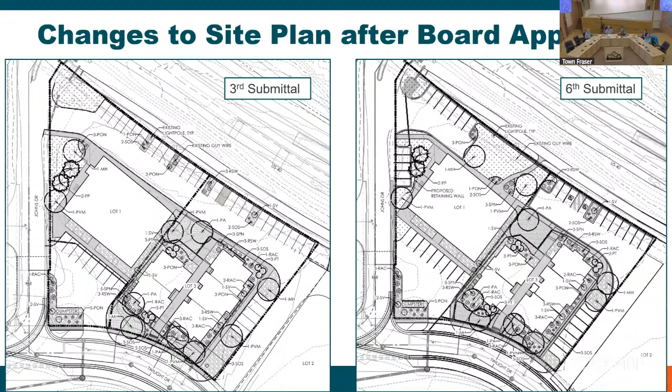So anything from the public at all? Okay.

Motion? I'll make a motion to approve the extension. I don't know what else to say. Is it Resolution 2026-0301? Yeah, okay, I make a motion to approve BOA Resolution 2026-0301, approving an extension to the duration of approval for the Ascent height variance.

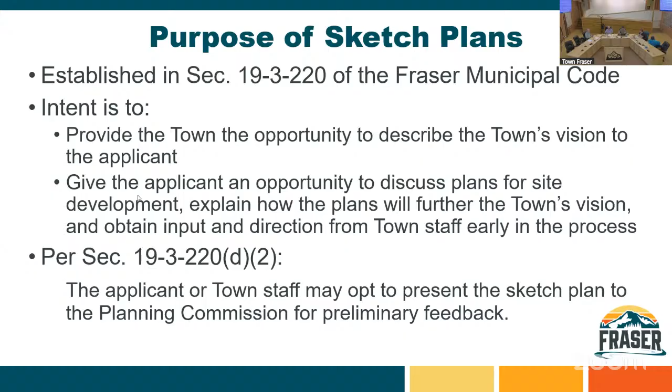So the applicant and property owner is 255 Mill LLC. We have Tom Fowler here in the room with us representing the property owner, as well as Jeff Van Sambeek and Nathan Meeson on the Zoom call, also as part of the project team.

This project is located on interior lots on the north side of Mill Avenue between Highway 40 and the railroad. The sketch plan proposes a total of 13 residential units, as well as approximately 1,800 square feet of general commercial space. This project is in the Riverwalk zone.

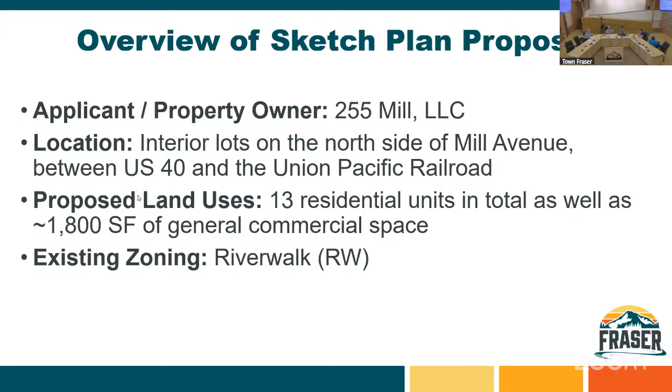Staff first met with the applicant about a year ago, and they submitted their sketch plan just about 2 months ago in late January. So definitely excited to see this brought forward, and excited to hear your feedback.

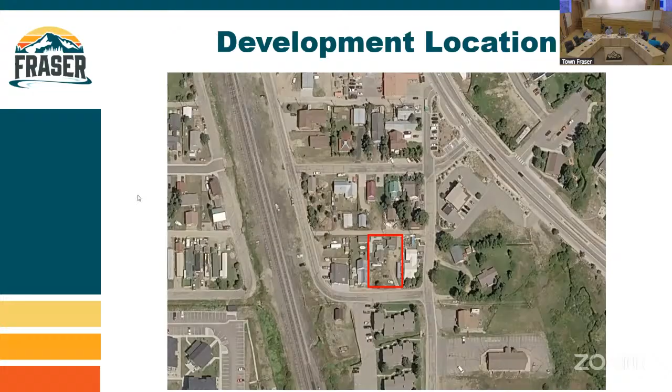So here's a look at the property location, again, on the north side of Mill Avenue, bounded there in red. And here's a look at that property in our zoning map.

Primarily surrounded by other properties, also in the Riverwalk zone. The Divide condos to the south of Mill Avenue are high-density multifamily. And then there are some properties just to the east of Doc Susie that are zoned business.

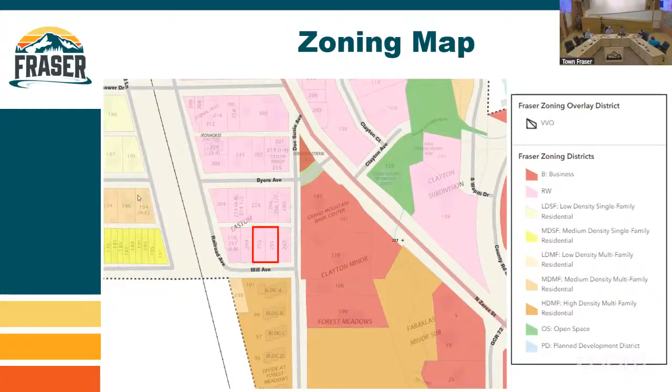But in a way, this is a pretty whole-scale reimagining, trying to use the entitlements of the Riverwalk zone district.

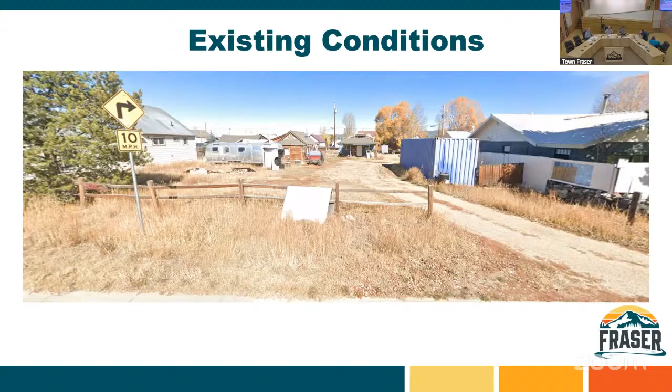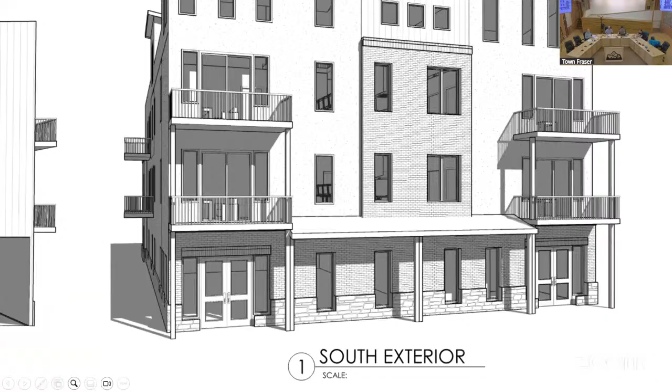Even though this is a black and white rendering, some of the proposed facade materials are evident. If I could zoom in here, such as some stone masonry and brick, and then other, maybe more generic siding or stucco type material proposed.

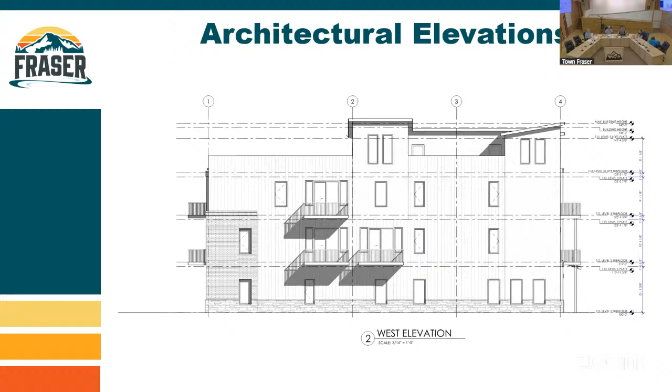Here's a look at the elevation, at a scaled architectural view. I just wanted to note that, at this level of detail and the height that is being shown, this does comply with the 45 feet maximum building height, as you can see at the very top line, within the base height that's allowed.

So next I wanted to talk about a few of the things that staff identified in our review. I will be brief on these, but please feel free to interrupt me with any questions. Want to give the applicant an opportunity to talk about their plans. After they submitted this and staff reviewed it, they indicated that they would be tweaking some things, so definitely want to give them an opportunity to share any updates to their concept.

Starting off with residential density in the Riverwalk Zone District, the base density that is allowed is 20 units per acre. That can be increased by one of two different means. One is the provision of ground floor commercial uses, which increases density up to 40 units per acre. The other is by providing deed restricted affordable units, and when that is done, there is no maximum unit per acre density, but the development still has to meet all other zoning requirements: height, setbacks, parking, etc.

So this sketch plan, as provided to the town, envisioned using the ground floor commercial density bonus, which would allow a total of 12 units on the site. The site is just under a third of an acre. Additionally, a 13th unit could be allowed based on staff's interpretation of our ADU regulations.

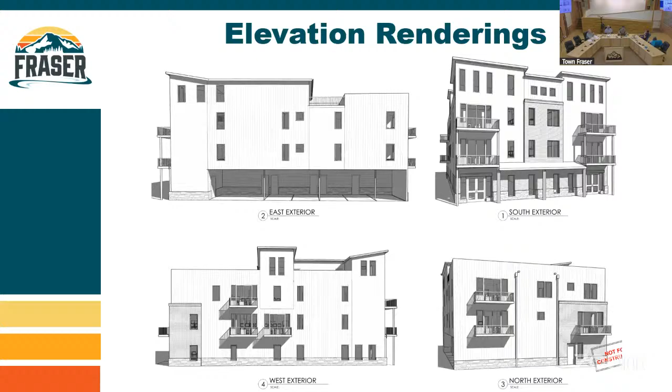Question: you say it has to be tied to a unit in the main building? Any unit, or a unit that would be in close proximity to cottage A? It doesn't necessarily need to be in close proximity. It could be a unit on the second or third floor. It doesn't necessarily need to be the ground floor unit, if that's what you're asking.

I was asking if it's to be connected to an existing property that's being built, wouldn't it make sense for it to be a connecting unit that's close by cottage A? Yeah, I guess they're connecting in the sense that their ownership can't be severed from one another. So the ADU cannot be sold separately, its ownership has to be tied to that of another residential unit. As long as there is that legal ownership framework for the ADU, its physical proximity on the site is less of a concern, or it's something that's not really spoken to in our code, I would say.

Okay, I get it. How big is that cottage?

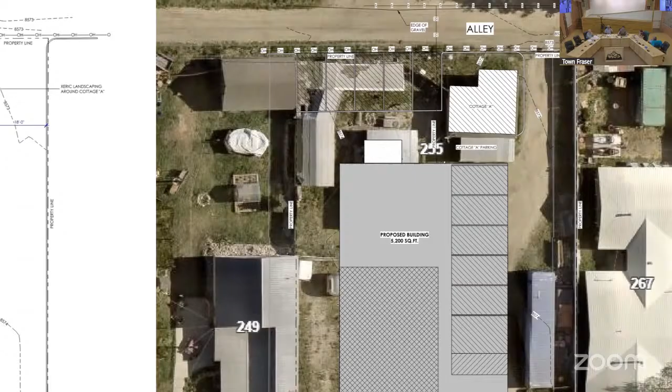Cliff Clayton was born in that cottage. Oh, really? Oh wow, it's tiny. So it's really small. So it's not an issue with the 50%.

For some of the units, it could meet that, and we can pull up the sketch plan later. The applicant, when they're presenting, can clarify. My recollection is that this cottage A was on the order of between 400 and 500 square feet, and I think the ground floor ADA accessible unit was the largest,

and may meet that 50% requirement. Just curious, did it belong to the HOA as a caretaker unit, or kind of an odd concept? Yeah, potentially. I think our code is maybe somewhat silent on that.

I think the ADU itself is kind of counted outside of that unit-per-acre calculation. So for other zone districts, like our multifamily residential zones that allow a certain number of units per lot or per lot size, you could build that number of units, say a triplex or fourplex, and still have an ADU on top of that. So it's kind of like an additional bonus unit, but as far as it being a caretaker unit, I think our code is relatively silent on that.

But why could they not just condominiumize that cottage as well? I was getting ready to ask the same question. So it gets them over the number of units? Right. In this case, because they're seeking this 40 unit per acre density, or at least that was initially proposed, that caps them at 12 units overall. So 12 units in the main building plus the ADU is kind of the workaround to that.

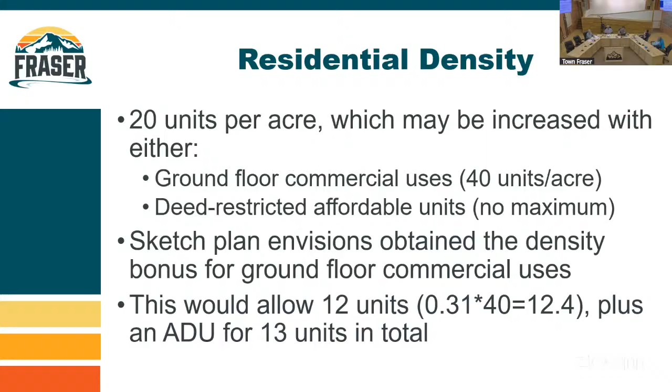Any other questions on this aspect of the density?

What's the setback from the side of the building to the west? So in the Riverwalk zone for a mixed use proposal, there are no minimum lot setbacks. Like this plat, do you know what that setback is?

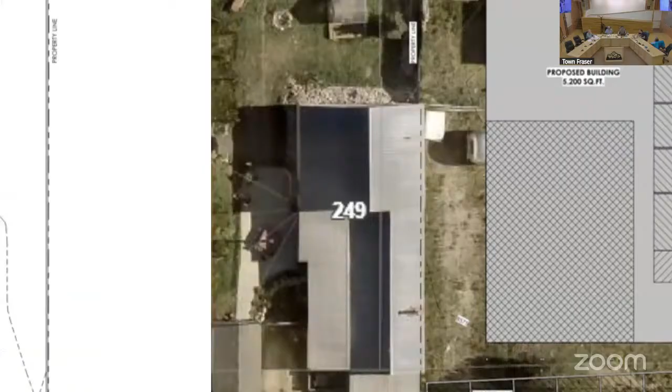I wonder if it triggers the fire code. There was more room, a decent amount of room on the west side. Just eyeballing it, it looks like 15 feet, maybe 12 to 15 feet, just looking at the parking space.

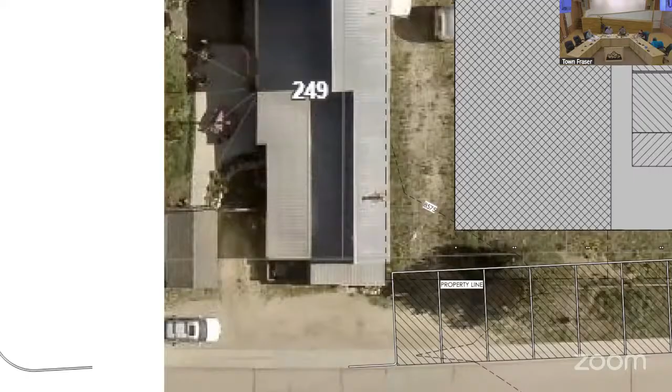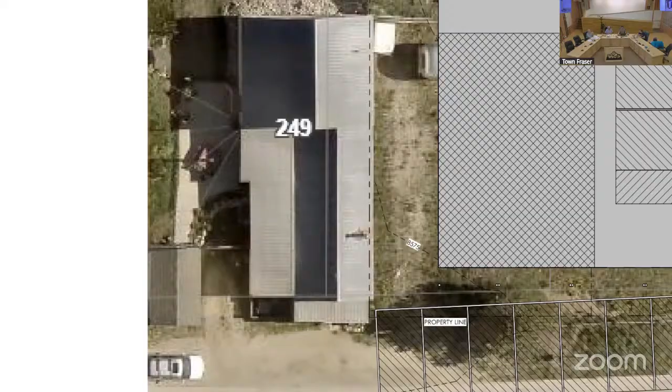This brings up an interesting question we may face in the future. If you're within the fire requirements where you've got a fireproof assembly, there's an existing building next door to a building that wants to get into that setback - who pays for that existing building to be made fireproof? I would assume it would have to be the developer, but I wonder if our code even addresses that. I don't think so.

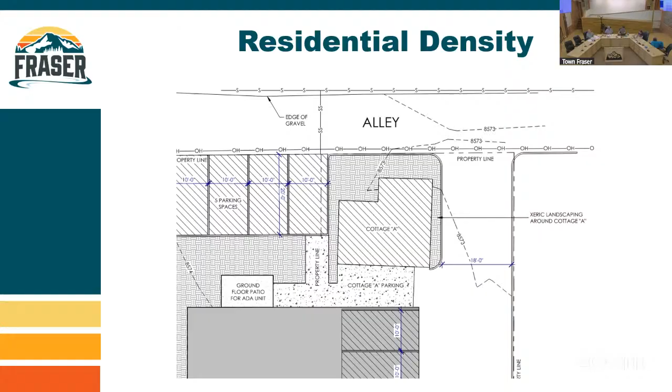The sketch plan here helps us identify things that may be shortcomings in our code. I'd hate to think that a homeowner would have to do thousands of dollars worth of improvement to their building to allow the neighbor to get within the fire setback. Just a thought.

Excellent point. So last thing I'll touch on is residential density. For this ground floor commercial density bonus provision in the Riverwalk zone, our code says it's met if at least 40% of the ground floor of the structure is commercial. So in staff's view, we considered the tuck under parking area, looking at everything bounded in this red box as the ground floor area of the structure, because the second and third floors have occupiable space in this area, so we used that larger ratio.

I think it could certainly be argued that an interpretation of our code should look at the occupied space on the ground floor and exclude the tuck under parking area, even if there are occupied uses above it. That is what the applicant initially assumed, looking at this L shape as the ground floor of the structure. Admittedly, that's probably the most correct reading of the exact language in our code.

But reading it that way has the potential to lead to outcomes that are not as desirable - I'm thinking of a situation where the majority of the ground floor is dedicated to tuck under parking with a very small, token commercial space. I do think the applicant is making a good faith effort to balance uses here. If you include the tuck under parking area, the commercial ratio is about 35%, so they're not too far off from 40%. But if you remove it and look at just this area, they're at approximately 48%, so meeting it if you calculate it that way.

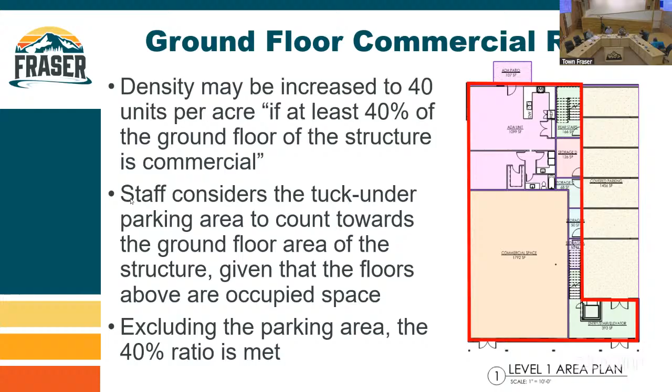Go ahead and we'll finish the presentation, a little bit more discussion, and bring the applicant and the public into it. I'll be quick on these next few so we have more time for open discussion. So the next items I just wanted to highlight deal with parking and the sidewalk.

The applicant proposed 7 perpendicular parking spaces along Mill Avenue, mostly within the Mill Avenue right-of-way, to serve the development. On-street parking is allowed to serve the parking minimums for properties in the Riverwalk zone.

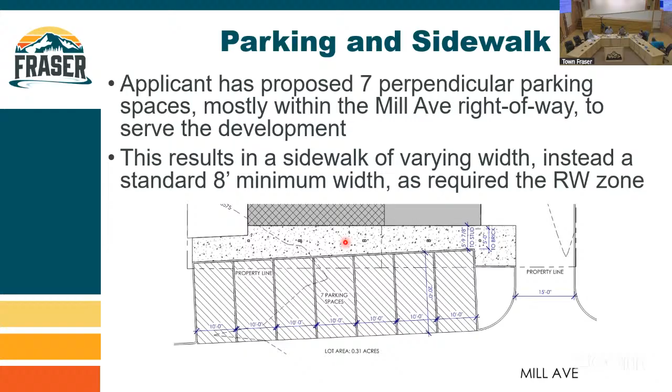One of the quirks with this proposal was that the alignment of these parking spaces reflected the existing paved area of Mill Avenue, which I'll show on the next slide as well. This resulted in a skewed parking angle in relation to the building and the lot line. And then you had this sidewalk of varying width, approximately 5 feet at the narrowest, widening out going to the west. So this kind of shows those parking spaces angled to respect the existing alignment of Mill Avenue, if you will.

But one other thing is that sidewalks are required to be a minimum of 8 feet in width in the Riverwalk zone, so this sketch plan isn't compliant with that provision of our code. Also, in staff's opinion, I think perpendicular spaces may not be consistent with the long-term vision of the street, or our downtown streets in Fraser more generally.

So something that staff proposed to the applicant was to first locate the sidewalk fully within the Mill Avenue right-of-way. Mill Avenue has 60 feet here - this white line at the bottom is the southern end of the right-of-way boundary. So within a 60-foot right-of-way, you can fit 8-foot sidewalks on both sides, parallel parking spaces on both sides, and a travel lane. That's what the town is doing over on Clayton Court this summer.

So the initial suggestion from town staff is to do a similar type of street section, and as an initial phase, the applicant would simply be responsible for the area in front of their property - building the sidewalk lot line to lot line and paving this area. It looks like you could maybe fit 4, but certainly 3 parallel spaces in this area. At a minimum, this could be viewed as an interim condition, as staff, the planning commission, and board of trustees envision a more finalized vision for the entirety of Mill Avenue.

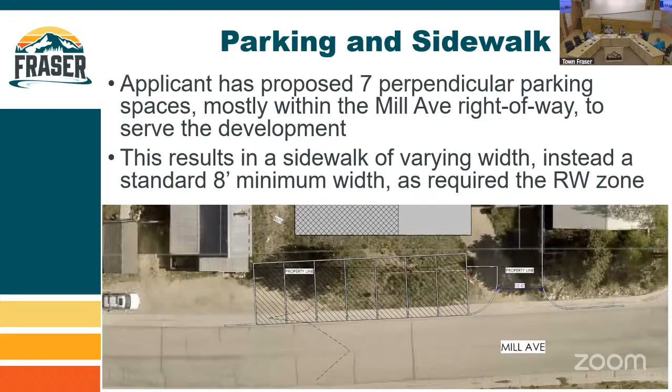Are they needing the perpendicular parking in order to meet requirements? Are they short on parking for the number of units? Is that why they want perpendicular versus your suggestion of parallel? Yes, with the perpendicular spaces, in staff's view they were just 1, maybe 2 spaces short depending on how you do the math. Even with the perpendicular, and the amount of commercial square footage and number of units and bedroom counts, depending on how you round, they're 1 or 2 spaces deficient.

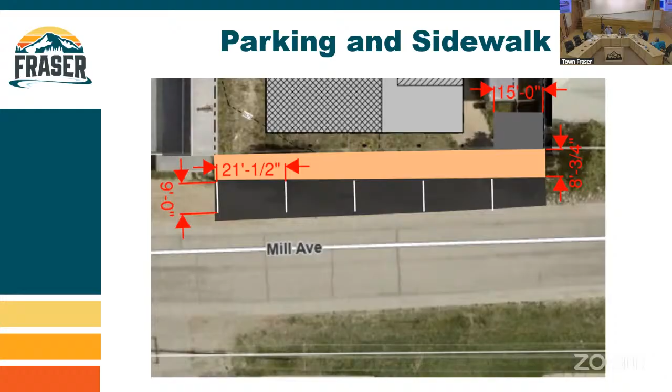So even when you go from perpendicular to parallel and you lose 3 or 4 of those spaces, that creates more of a deficiency, certainly with this proposal. But that's a great segue into the next item for discussion.

In our code, there is an allowance, a 10% parking reduction for properties that are within 250 feet of a transit corridor, which our code defines as Highway 40. In staff's opinion, 250 feet is a very short distance. This radius shown here is 250 feet, placing that at the edge of Highway 40. This site is just outside of that, being down here.

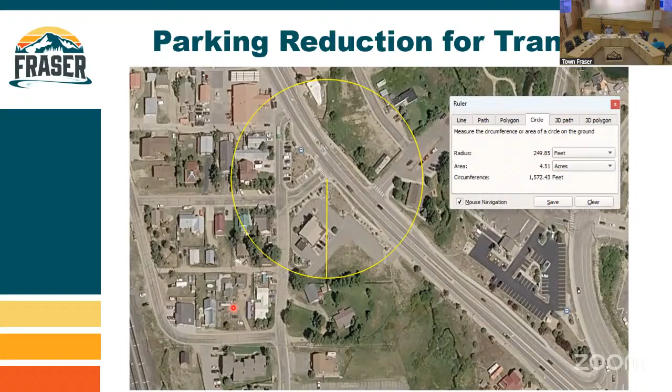In more urban contexts, or when thinking about transit planning, a typical walk shed to a transit stop is anywhere from 1/8 of a mile to half a mile. Again, our context here in Fraser should be viewed somewhat differently than just general best practices. But something I wanted to show the Planning Commission is a 1/4 mile radius around the site. There are 10 different Lift bus stops, and a handful in very close proximity. Goranson Station is certainly extremely walkable from the site, as well as the Amtrak station, the Bustang stop. So I would personally view this site as being in close proximity to transit based on this alone.

But just looking at the size of even a 1/4 mile radius, if we amend our code to allow this, we're talking about a potential transit reduction for most, if not all, properties in the Riverwalk Zone District. So it's a balance between the on-the-ground reality that there is pretty good access to transit throughout the district, but that was also the vision for the Riverwalk district, as a walkable district.

And I think that 10% reduction is still subject to planning commission and board approval. And if it's not written that way, it certainly could be. It's not an automatic thing, is my understanding. So these again are opportunities to clean up our regulations too.

I'd like to point out that if you're looking at LEED standards, they have radiuses that they promote for their neighborhood plans and transit. I believe, going by memory, 1/4 mile is what they use. If you're within 1/4 mile, then you qualify for the LEED standard. It's something we ought to look at and be consistent with. But I'm certainly okay with 1/4 mile. Yeah, I am too.

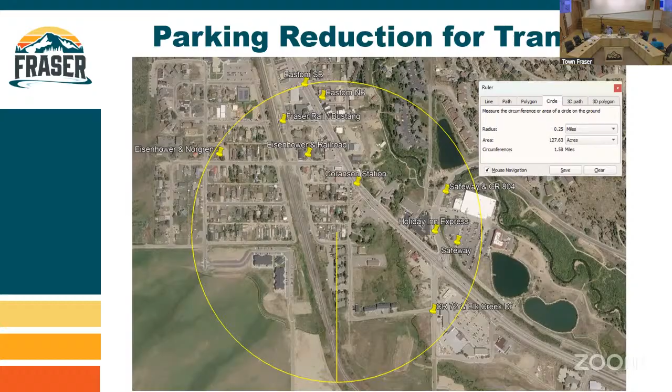Even in ski boots. Yeah, I've walked further than that in ski boots before. You have to just get from the stupid parking lot to the base of the mountain.

So that concludes the major items I wanted to touch on. Certainly there's other aspects of this proposal we can discuss with the applicant. But as a reminder, next steps: it would be a major site plan application. The applicant would also need to submit a major subdivision to combine what are currently 2 lots into one. Staff is recommending that the preliminary plat step be waived, allowing the applicant to proceed straight to a final plat.

It's an allowance in our code: if a sketch plan is submitted, staff has the ability to waive the preliminary plat. The reason is that especially when the sketch plan comes to the Planning Commission, it's viewed as a public forum for reviewing the application, though not a noticed public hearing. By doing that early in the process, it allows them to skip that step while still having public hearings for the major site plan and final plat. So it incentivizes the applicant to do the sketch plan to get initial feedback, and by doing so they get to skip a noticed public hearing.

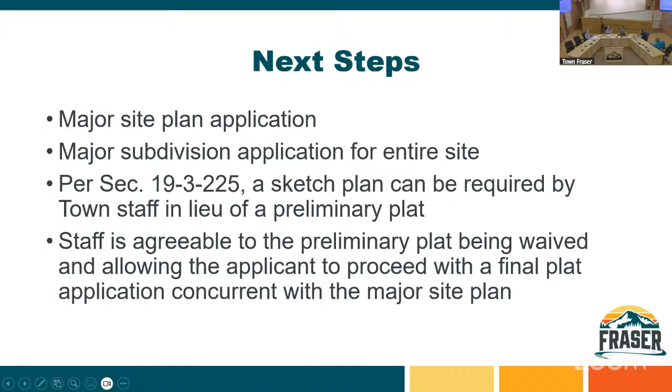You cited one thing in our regulation that talks about relative sizes of buildings. This is our first major project in what was a residential area, and has been a business zone for a long time. But we've got 2 houses on either side that are 12 feet tall—well, Bryant's is a bit taller. I'm not sure how we address that. Maybe steps in the building, kind of a clerestory type approach.

They've got a loft apartment on the fourth floor that, without losing a lot of square footage, is there some way to make the mass of this look not quite so out of place in that neighborhood? Although that neighborhood could, over the years, have changed all of this too. But I think we put that in the regulations for a reason.

That's a great point. Referencing our building design standards for commercial and mixed-use development in section 194190, there is a design guideline that speaks to the mass of buildings, and it says they should be compatible with adjacent buildings. I think it's up to interpretation by the commission and our board how much weight you give to what the zone district allows for this site compared to the existing uses that have been there historically. But I certainly don't argue that a building of this size would be taller than what's there adjacent to it currently.

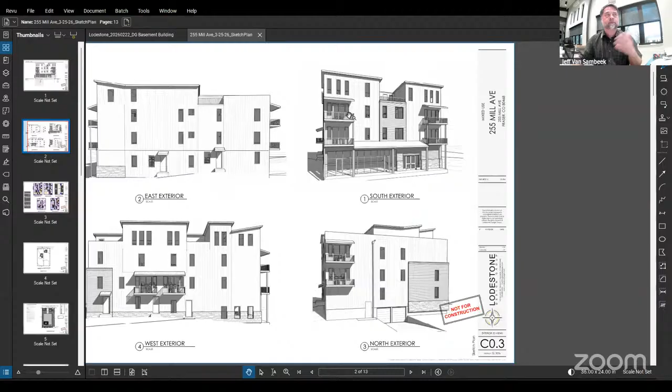So after making our submittal back in, I guess it was December, we came in and had a meeting with staff after receiving the comments on the initial sketch plan. In my opinion, it was an incredibly helpful meeting for us to get a better understanding of what we didn't understand about the Riverwalk District Zone and what the goals were there. So we took a lot of the feedback from that meeting and the sketch plan comments and implemented them in a revised version. I'll run through this quickly, and then I'm happy to answer any questions about why we made the changes we did. I think this mitigates a lot of the more significant concerns that staff had.

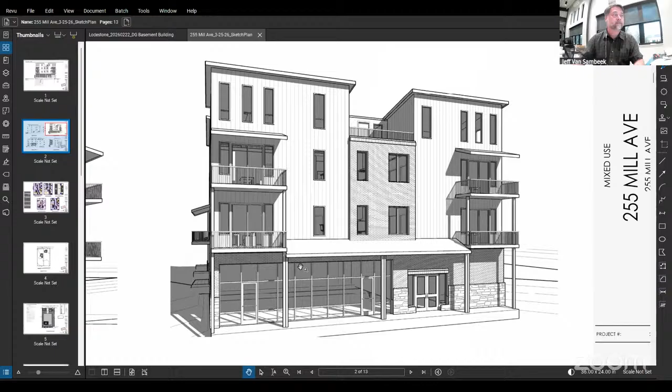Overall, the look at the building hasn't changed a whole lot. We did freshen it up a little bit and added some features that staff noted in their comments. But the big change we made is actually how we address the site. The plan now is to do a parking level underneath the building, not fully underground because of the limited space we have on the site to actually ramp, but to come off the alley with a drive aisle that ramps down to essentially a garden level basement, and do all the parking underneath the building, or most of it.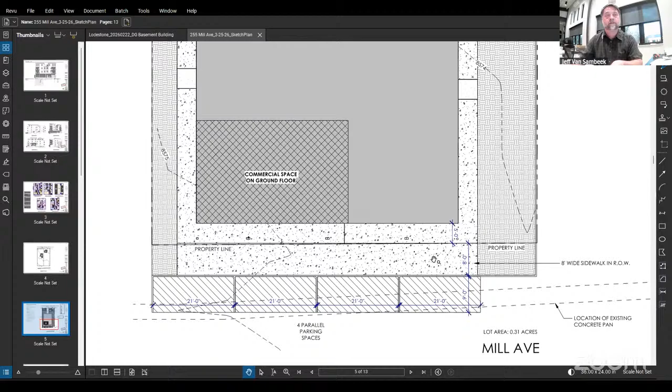We still likely would want to keep these 3 surface spaces, and then the hope is to keep the cottage and a parking space next to that cottage. We'd also change the parking along Mill to be, as staff recommended, parallel parking with an 8-foot sidewalk in the right of way.

With this change, we also rethought what we wanted to do with commercial space. We decided it would actually be more beneficial for us and the way we think this building would get used to eliminate trying to go after the commercial allowance for the density increase, and instead go for the density increase with affordable housing. So our plan now is to maintain some commercial space, because I think that's a key element of the Riverwalk District, and also a feature of this building, since we have a potential tenant interested in the space, so we're trying to size it appropriately for that.

But now that we're going after affordable housing as the density waiver, we're able to eliminate all the weirdness with the ADU of the cottage. Essentially, the cottage is a unit, and we now have that one unit plus 15 units in the building that we need to find parking for. So we've got underground parking in the basement of the building.

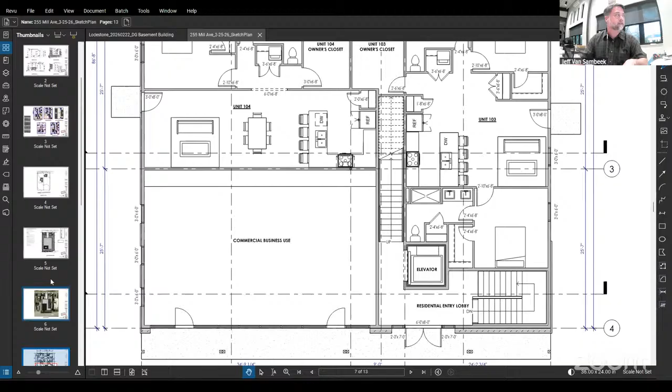I'll just do it here. So essentially, the driveway comes in the back. We've got parking on both sides of a kind of basic parking structure, two stair towers and the elevator connecting that to the rest of the building.

The main level consists of five units of varying size, a number of one bedrooms, a studio, and a couple of one and two bedrooms.

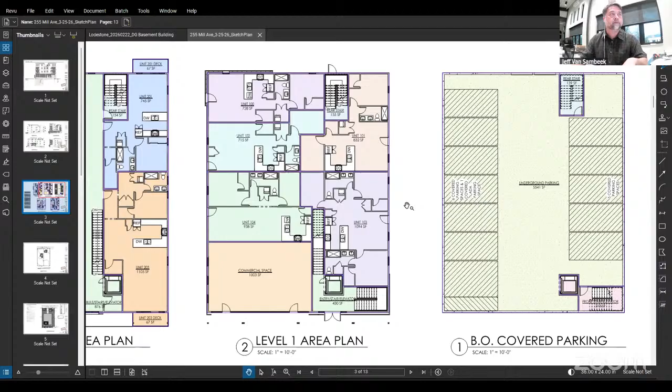The second floor is pretty much the same as it was in the initial application, with some minor tweaks to where some balconies are and that sort of thing.

The third floor and its connection to the lofts, the fourth level, is also similar, but we did bring one other unit all the way up to a loft level. So in the original application, we had three units that went to the loft. Now we have four that go to the loft.

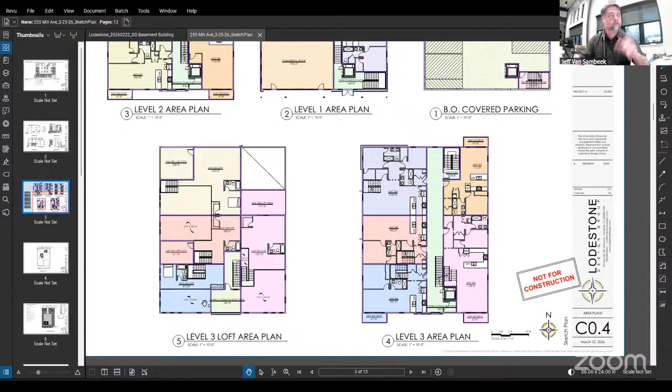So some changes there. We also wanted to try to get a common area on that loft level for the tenants that don't have access to a rooftop deck. This would be a common rooftop deck on the front of the building, which you can kind of see in that front rendering, just to amenitize the building a little bit more.

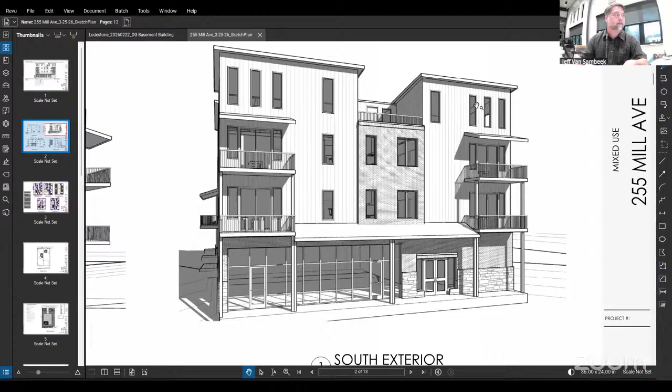So that was sort of the feedback we took in from that meeting. The location of the building right now, rather than trying to center on the lot, because we're bringing this drive aisle in, we want that drive aisle centered on the building. We're trying to keep the cottage, so that's sort of driving the building location right now.

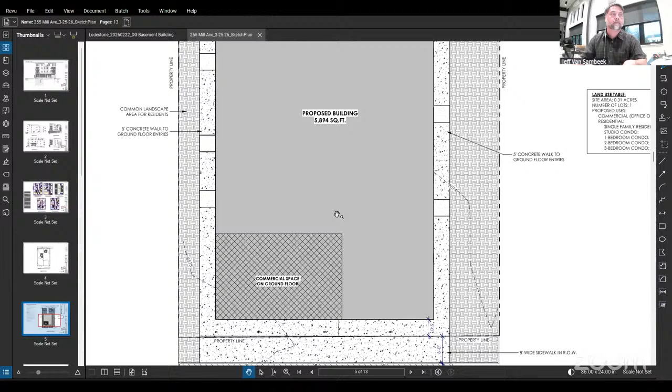We do still have a setback. I don't have it dimensioned on here, so I apologize for that, but roughly 12 feet on the west side and more like approximately 18 feet on the east side. The idea with those side yards is access to the ground floor units, as well as some open green space for the building, and also separation from the neighboring properties.

I heard the conversation about how do we mitigate the scale of this building relative to the scale of the existing neighbors. We're hopeful that the extended side setbacks are a mitigation strategy for that. But right now we are trying to lean into the building mass and height that's allowed for the Riverwalk district, because I think that's the goal for the area. So rather than limiting it to where we're at now, we're actually leaning into the future.

We did look at that. The other thing we were thinking about was that the buildings across the street, while the neighboring immediately adjacent properties are single-story residential, single family, the ones across the street are two-story with some higher roof lines. Just a little bit to the southwest, you've got some larger multi-story, multi-family residential buildings. So while we are definitely a bigger scale than the immediately adjacent neighbors, I don't feel that we're out of scale overall. I'm hopeful that that also mitigates some of those concerns.

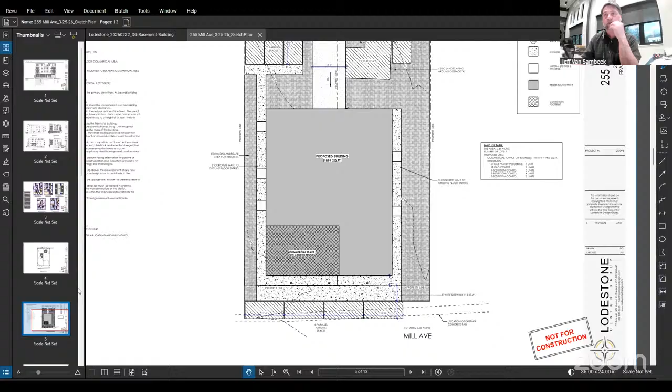I did want to respond - you mentioned a concern about fire separation and what the requirements are for the neighboring properties. We do have that property - well, really both of the neighboring properties are, by building code, too close to the property line to not be fire rated. The building code requirement relates to our building and our property line. It doesn't actually relate to our building and the neighboring building.

So no construction on our site would trigger any improvement requirements to a neighboring site, unless there's something special with the local fire district or your local building code that I haven't looked up yet. But typically that wouldn't trigger something for the neighbor. It would only be if the neighbor improved their property that they would then have to comply, and that compliance would have nothing to do with the location of our building. So even if we kept our building 30 feet from the property line, it's the fact that their building is near the property line that triggers a fire requirement for them.

So as far as our property goes, yes, where we're 12 feet off, we're going to probably - I think that winds up with like a one hour wall. Where we're close to 20 feet off, I think there's no fire rating required for that.

So anyway, it was very helpful to meet with staff and go through these comments, and then have a chance to make some updates before this meeting. Sorry for the kind of 180 on some of the staff's presentation, but hopeful that this moves us more towards compliance and facilitates this conversation.

So Jeff, this is Andy. What's the grade of the first floor? How deep is this underground parking going to be?

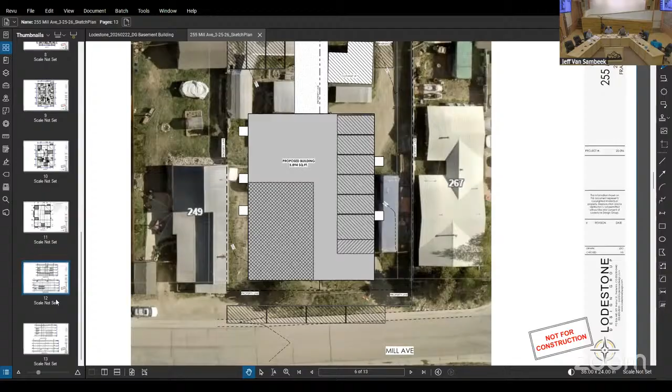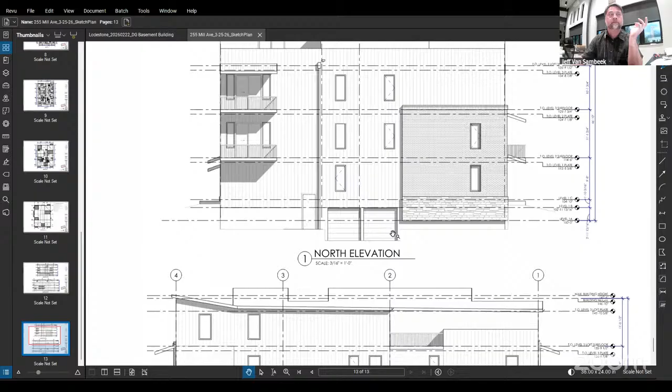So it's a challenge. What we're doing right now is stepping - you can see it on the rear elevation. The garage entry is only about a half a level down from the main level slab, with a little bit of site grading from front to back. The alley is about 18 inches lower than the street, so coming off the alley we've got a little progress toward a basement, but we only manage about 3 feet of fall before we hit the doors. Once we're inside, we can continue to slope that slab down.

So what we're proposing is essentially a slope - this is the north elevation, the front of the building, on the right, with the alley back here on the left. Basically the basement slab is going to come through on a slope, and we're going to step the floor inside to match that slope.

The commercial space will be at grade at the front of the building, and we'll still maintain 10 feet of clearance. So essentially the slab at the front will be about 9 feet deep after we deal with curb, sidewalk, and slopes outside, and then it'll slope up from there.

You'll be as deep as 9 feet below grade, or? That's currently what we're looking at.

Yep, so I'm sure you'll do groundwater testing. I've got an old surface well, should have been filled in long ago, right on the other side of the fence from your property. Typical groundwater level there is about 3 feet. That's good to know.

I'm glad you're moving the parking to that location, but it'll be interesting to see how it works.

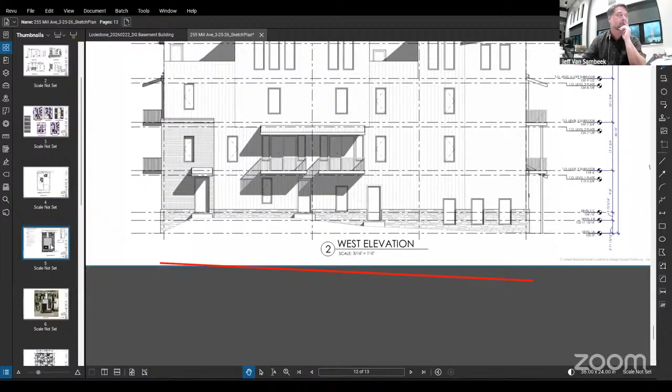So right now we're saving the cottage because the cottage exists, so in that sense it has some value. It also is part of the neighborhood - it's been there a long time. It's a structure that Tom, the owner who's here in the room, has some history with. So the idea right now is to try to save the cottage.

It does have a long history. I missed who was born there, but I think I'm correct - I've heard from the Claytons that Cliff was born there, actually in that building. Cliff was the son of our first mayor.

But yeah, primarily we're saving it because as an existing structure it has some value. It's not an amazing structure, and it will certainly need work to be more habitable by the time this whole project is done. It also gives us the opportunity to use that structure as a place for the general contractor to office out of while doing this construction, facilities like that.

Does it have a foundation? I honestly don't know. I don't think so.

Well, we'll get to some comments, so we can share the microphone and hear from Tom. That'd be great. So, any questions for the project designer here from Jeff?

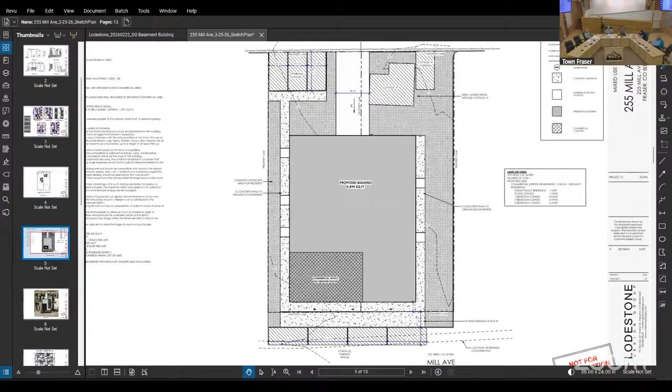Peggy has her hand up. Peggy? Can you hear me? Yes. So I'm not sure, what is the rule about balconies in a setback? Can it protrude into a setback?

No, however, in the Riverwalk Zone District, there are no minimum setbacks. So as long as the balconies don't extend past the property line, say into the Mill Avenue right of way, this would be allowed in our code. Maybe an item for discussion for the planning commission is, it's sometimes common to allow encroachments into the right of way for things like balconies or awnings, but my understanding is that's not allowed as our code is currently written. But I believe, and Jeff can clarify, even with the revised proposal, none of the balconies would extend into the right of way or across property lines. I guess my concern was, I think this new plan, which I like, and I am concerned about the water table.

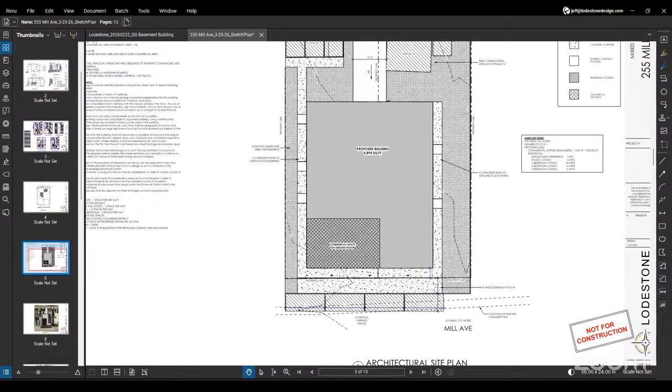But I do like the fact that parking's underground. But I do think for saleable units, you need outdoor living spaces, and it looked like we lost some of the balconies in the previous plan. Being in real estate, it's pretty hard not to have an outdoor space when you're up in the mountains. People really like that outdoor space.

Yeah, no, that's helpful feedback. And the way we have it set up right now, every unit does have a deck or balcony, or a stoop entry at the ground floor, so they would have yard access adjacent. Okay, because it just looks like on that western exterior, there's only 2 balconies. So then I guess you got them on the ends, in front, and there's only 3 units on that side. Okay, all right.

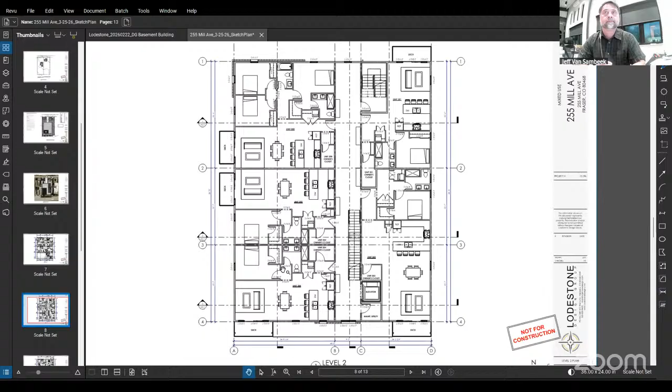And to answer the question on the encroachment, right now, the way the site is laid out, we've held the building back behind the property line, so you can just see the square columns of that front porch condition sitting behind. It does mean that we wind up with a 13-foot sidewalk, but maybe that's not the end of the world, especially for that commercial unit to be able to use outdoor space. Might be really nice.

Well, I think even deeper balconies would be beneficial, but I don't think, if you had to walk underneath a balcony on a sidewalk, that's a deal killer. No.

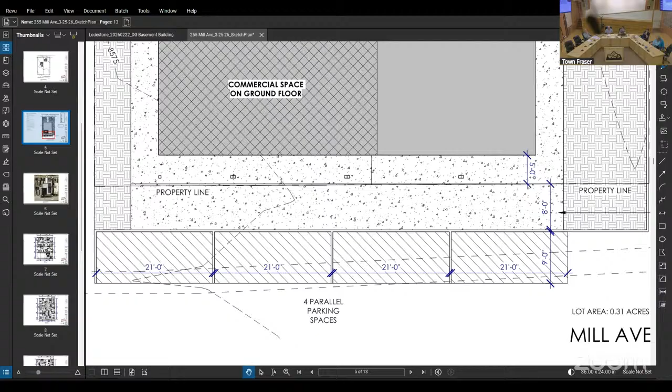Any comments from the public at all, or? Just your name, where you live, please? My name's Brian. I'm the other neighbor on the other side of this.

And first I want to say, I'm not really opposed to this. It's actually nice to see something happening on this lot finally. It's kind of been an eyesore on the neighborhood for quite a while. But most of my questions go to you guys on the board here in the town: is this style of building really what Fraser's looking for? I know it's allowed within the Riverwalk district. I know they're meeting all the requirements, and that's great. I work in construction, like, if it didn't happen, I wouldn't be up here.

This is exactly what they have 100 of in Fort Collins, in Boulder, in Summit County. Is that really what we want here? And if it is, it is. I'm not gonna say otherwise, but where does that go?

The other side of this is that neighborhood was never really built with anything like this in mind. So you have all that access off the alley in the back now. That's just a little 8-9 foot wide strip. Can that handle this even? Does that need to get fully paved or something done there?